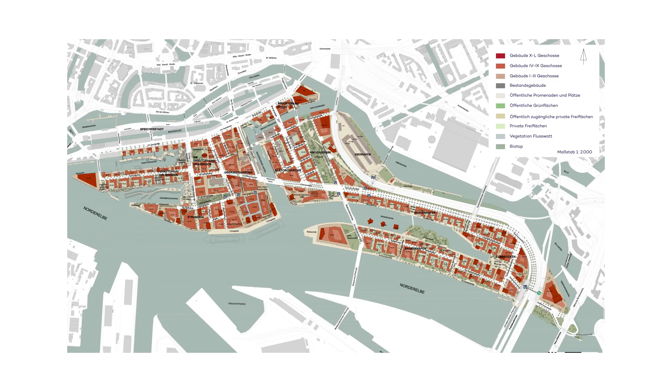One of the key components of the concept was that they would found a new club for the new Baakenhafen district. And that was also supported by the city in the contracts to ensure that this concept would later be implemented. And by now, since the Baugruppe already lives in the building, sports activities are already being offered within the neighborhood.

The application was then submitted at the end of 2017. And 2 years later, 2 years of waiting, they were awarded the project. Baugruppe then received the assignment to start the project and to announce a so-called architectural competition. This sporting idea, this team play, was actually for us the central idea that guided our design approach.

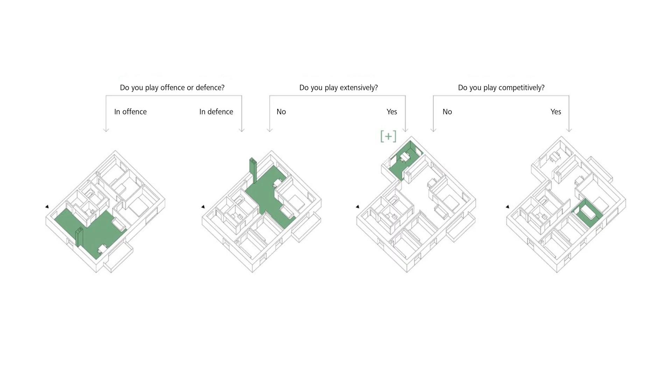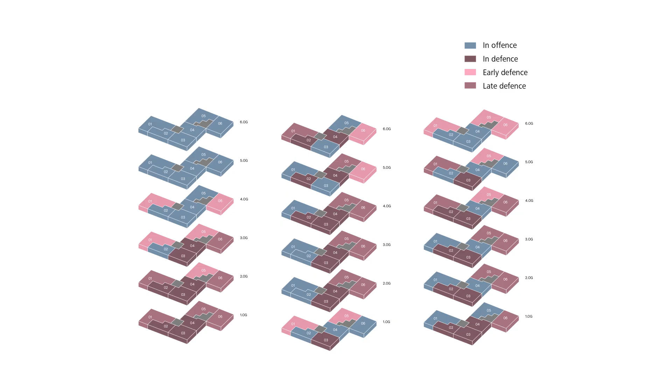The flats are designed like a playing field, and then the boundaries were shifted. There were control rooms on this playing field that could be assigned to one team or the other. In the end, the concept already stood out in the competition for its uniqueness. Translating it into the floor plans meant creating both introverted and extroverted layouts. 2 floor plan variants, which the building parties could choose from.

And on the other hand, certainly also that it wasn't a brick facade, but a ceramic facade. Various ceramic tiles were combined here. In the plinth area, we have used standard straight tiles, and from the first floor upwards the tiles were slightly tilted. The tilt of these tiles creates an effect.

The solar radiation, depending on the season, the time of day, the sky conditions, actually varies from very, very bright to white to shades of grey to glittering surfaces which turn to gold when the sun sets. And that is then as a tribute to the water of Hamburg, which can be seen everywhere. And it also has something of a glittering water surface about it.

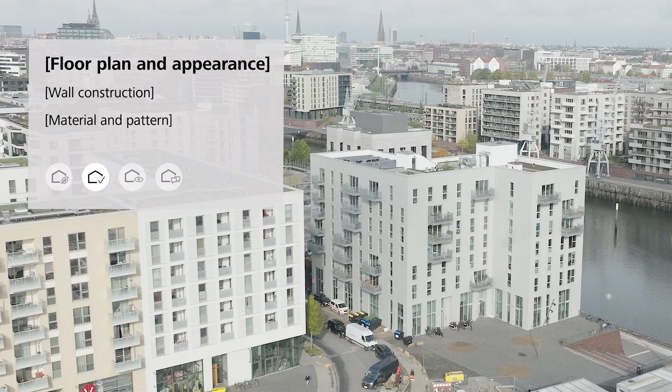The flats have 2 ground plan characters. We have called one of them offensive and the other one defensive. And these 2 very different ground plans work by placing the living spaces as public areas within the flat in different positions. In the offensive layout, it is here in the entrance area. In the defensive layout, it is located at the very back of the flat.

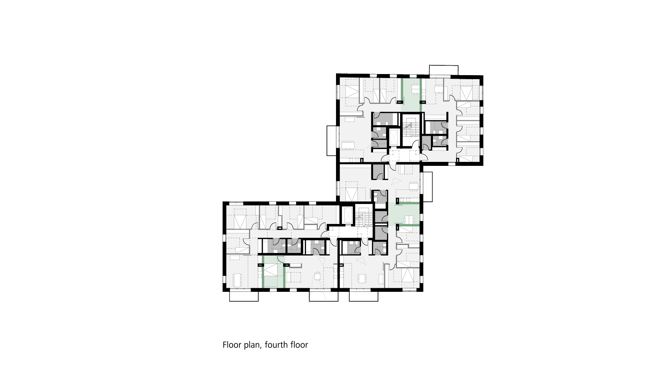A building concept naturally thrives from the individualization of the respective residential units. Nevertheless, it still requires a framework and certain guidelines so that 40 freehold flats are not each designed completely differently. And this concept has reflected that very well. We followed the design so precisely that some flats were changed and placed in different locations, unlike what we had planned initially. And interestingly, this concept is also reflected in the facade.

The Baugruppe itself has, through the choice of offensive and defensive flat types, contributed directly to the design. Ultimately, they determined the design. The city also had a say in the process and was regularly updated about the design status. Because Hamburg in particular takes a lot of influence on how buildings are created and how they appear externally. In the end, the city supported the principle of development, agreeing that the facade developed from the inside out through the ground plans.

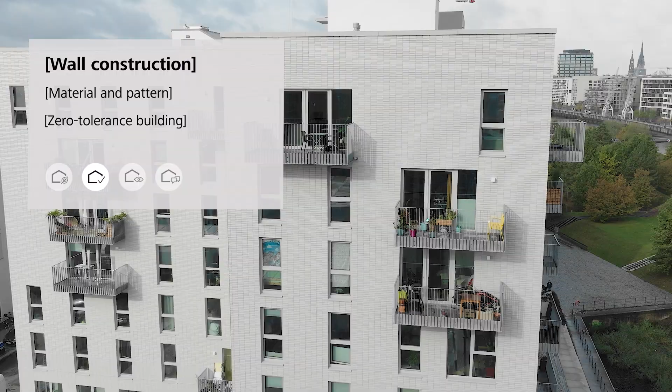The first 2 floors were built entirely in reinforced concrete. The load on the external wall is particularly high because of the facade's articulated design; projecting balconies, windows in varying positions, openings of different sizes, all required adaptation in the structural analysis. From the second upper floor upwards, construction switched to calcium silicate masonry wherever possible.

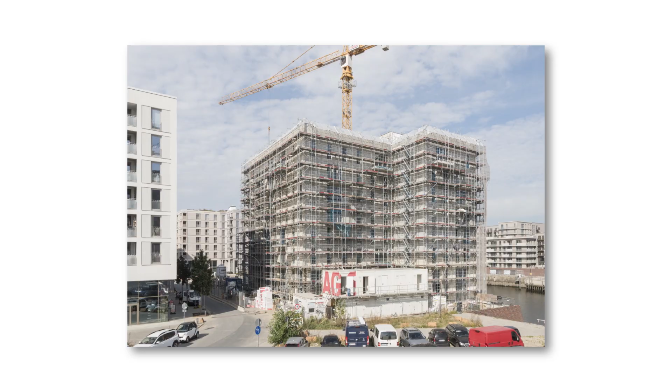So both facade systems, EWIS and RSC, were involved, and the main reason was the exceeding of the building boundary, which subsequently led to the EWI system, because an RSC facade requires a little more space in the construction depth. The rain screen cladding facade is typically used for large panel cladding, and already in the initial design ideas, the format of the ceramics would be relatively small and more closely resembled the clinker format of the surrounding area. These smaller formats could then be implemented within the external wall insulation system.

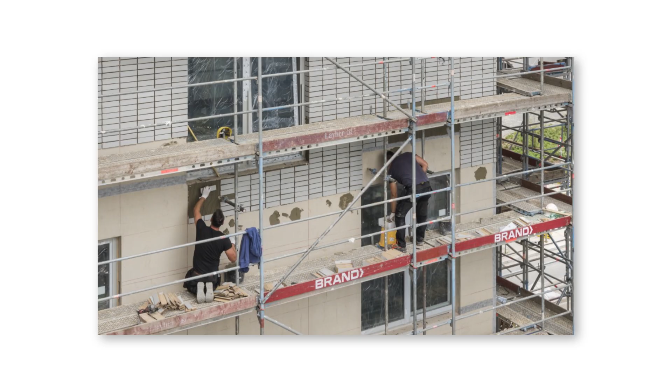We have mineral wool in 240 millimeter thickness, which is then reinforced and finished with ceramic claddings. It should meet fire protection requirements and it should comply with the Blue Angel certificate, and this is what we have achieved with it. The insulation system is equally suitable for reinforced concrete and calcium silicate masonry substrates. This could then be applied across the entire facade. And the advantage for us was a faster construction process and a slightly better use of the space.

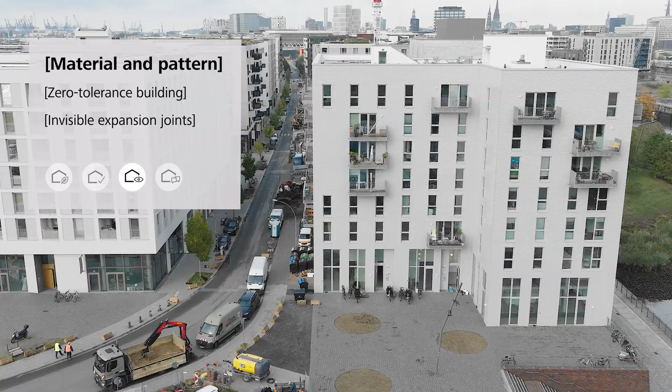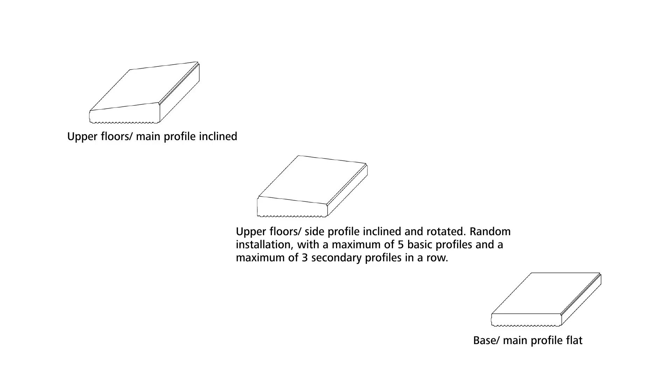And a very important aspect, of course, is the facade cladding with ceramic tiles. In the plinth area, these are smooth standard tiles. In the upper areas, however, specially designed angled tiles were developed, tilted against one another.

The basic idea was, by using a shard, that is a ceramic element in a small format, to achieve as much design effect as possible. The shape, the color, you have to feel it and you have to hold it in your hand. Basically, you do this with wood samples. You create a tool drawing, produce wood samples, in sufficient quantity per shard, about 10 to 15 pieces.

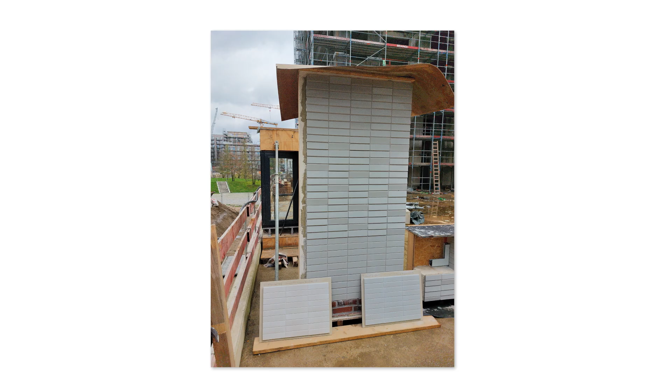There were fillets, there were curved tiles, there were formats with high points, there were also larger formats and smaller ones. In the end, we aimed for a subtle play of light and shadow across the facade. Ultimately we chose the simplest version with one tilt.

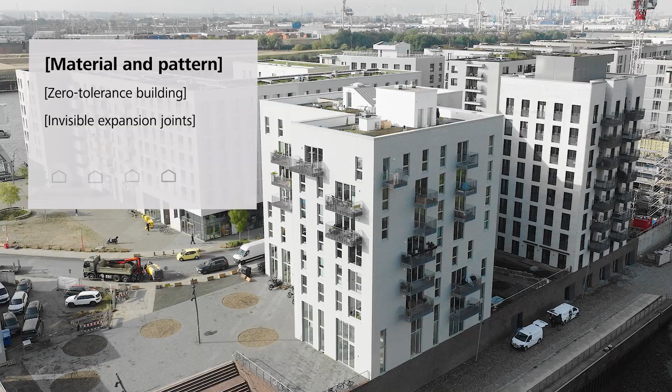There was actually a proper installation plan from the architect, and it was necessary to pay close attention that these schemes are followed precisely, because otherwise duplications or visible irregularities will suddenly appear in transitional areas. That was the challenge. The bricklayers had to internalize that. I heard very often, that's impossible. So in particular, the straight continuous joint was a major challenge.

We have permissible construction tolerances, which are unavoidable, and we had to plan them to the millimeter. The wall can have a tolerance here, then comes the insulation system, which can also have a tolerance in itself. The window can be placed either here or there. This also meant that the window manufacturer couldn't orient the position of his windows by the shell opening, but according to a site dimension. So we had to place the windows above each other accurate to the millimeter. They weren't allowed to stagger, to create continuous lines.

The window alignment was the biggest challenge, along with the distribution across the facade, considering unavoidable residual dimensions. In the end, it is a zero-tolerance system. Every millimeter lost anywhere will take its toll somewhere else. Ultimately, every joint was plumb-lined from bottom to top. We aligned them vertically, using cords or steel wires for the corners.

If you look at the pillar now, I think there are 8 tiles. If we had been off by a millimeter with each tile, then we would have ended up with almost 1 centimeter. It shows how important it was to check with every tile. Am I on the grid?

It worked very well thanks above all to the installers on site. Across the full width of the facade, for example, 13 meters along one side, they had to adjust the joint dimension so that everything lined up perfectly at the windows and building corners. You can clearly see that every window reveal, every lintel area, always ends with a stack bond.

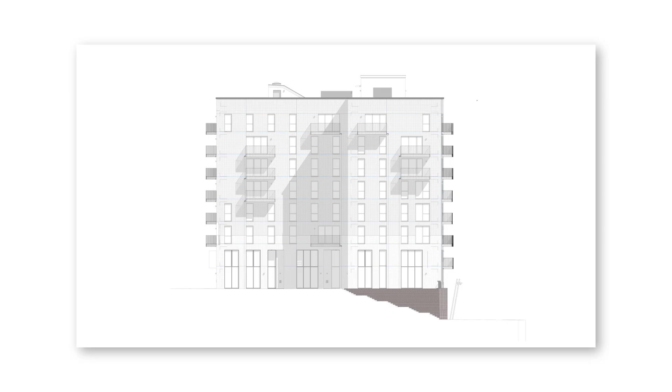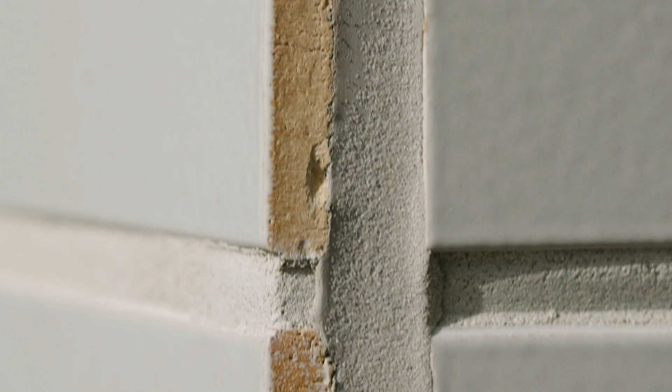We are very pleased that all the effort paid off in the end. That long process of sampling, reflection and testing required patience and persistence. And you can see in the project that someone put their heart and soul into it. Interfaces had to communicate cleanly and not fall into a state of inertia and only see their own advantage. Everyone needed to understand how interdependent the processes were in order to prevent conflicts that could no longer be remedied. And that worked extremely well here.

Through the light reflections at different times of day, the facade has become a very strong identification value and an eye-catcher. At sunset, the tiles glow in golden, glittering tones. Those are wonderful moments when you see that it works, and it works even better than we had imagined.